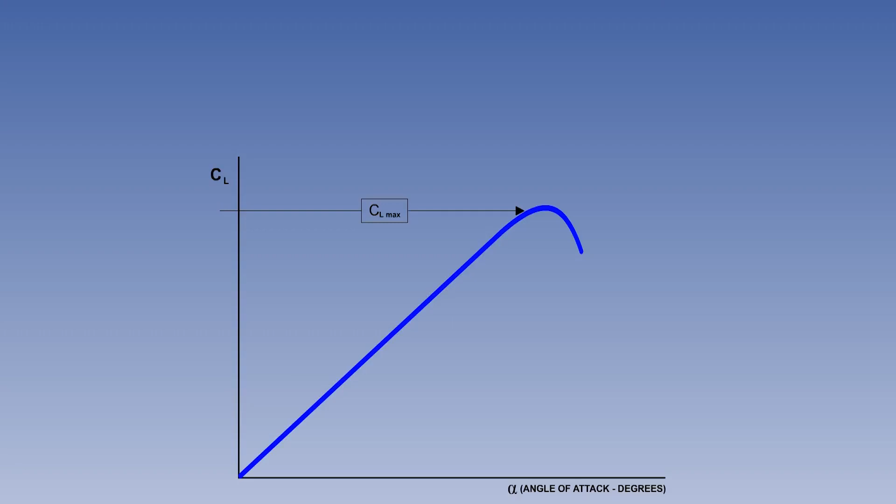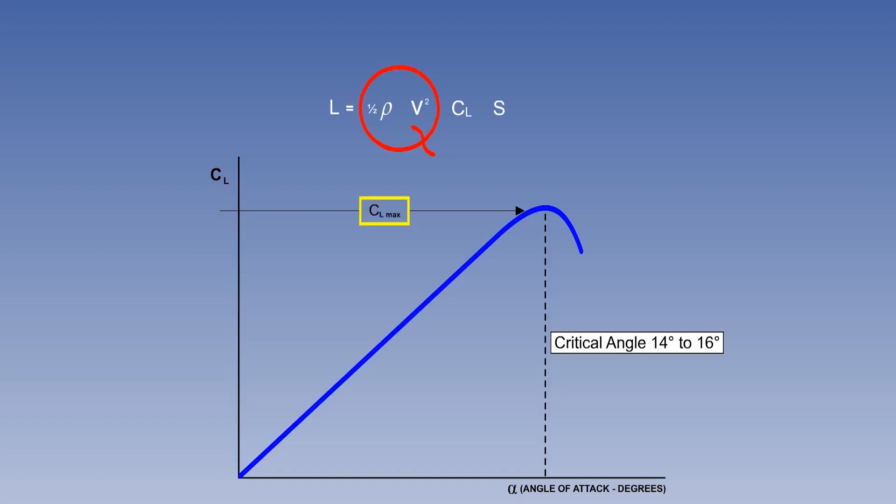There are several important facts that become evident from study of the lift curve in association with the lift equation. To maintain a constant lift force, any change in dynamic pressure must be accompanied by an adjustment in angle of attack. For a constant lift force, each dynamic pressure requires a specific angle of attack. Minimum dynamic pressure is determined by CL max, which occurs at a specific angle of attack, the critical angle, which is between 14 and 16 degrees, depending on the aerofoil. The angle of attack for CL max is a constant for a given configuration.

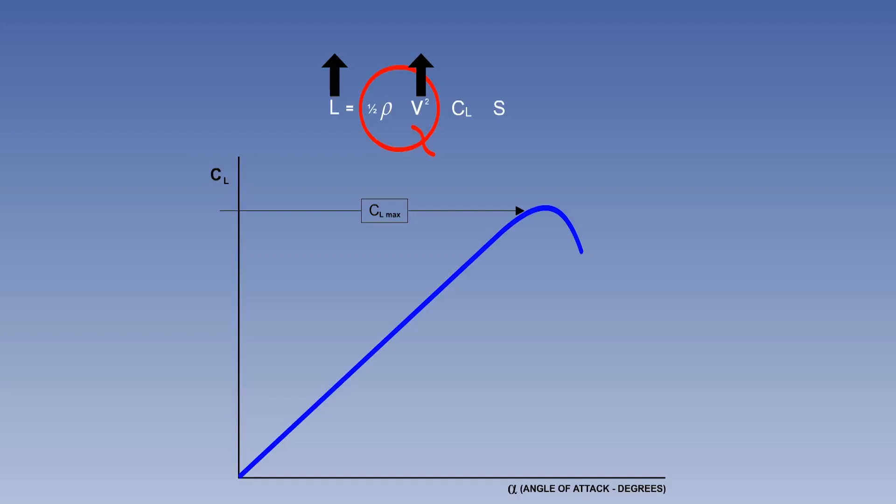If more lift is required because of greater weight, a greater dynamic pressure, that is, more speed, is required at a given angle of attack. The greater the weight, the higher is the minimum dynamic pressure or speed required for level flight.

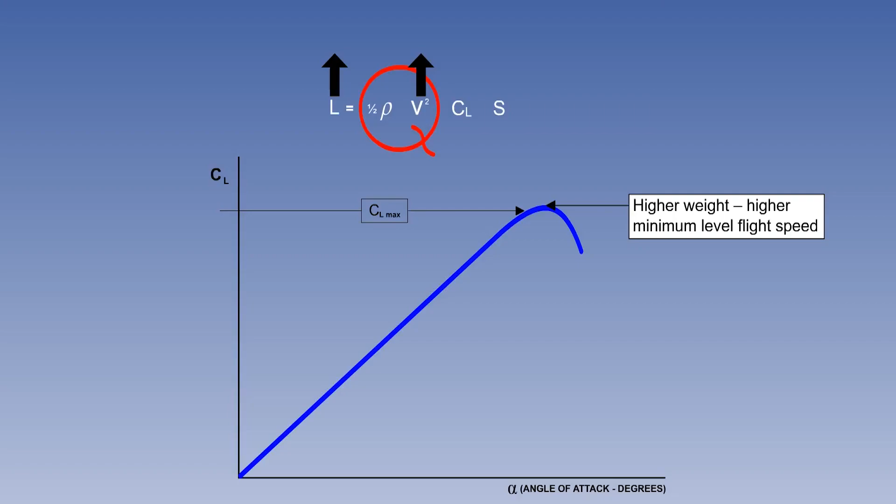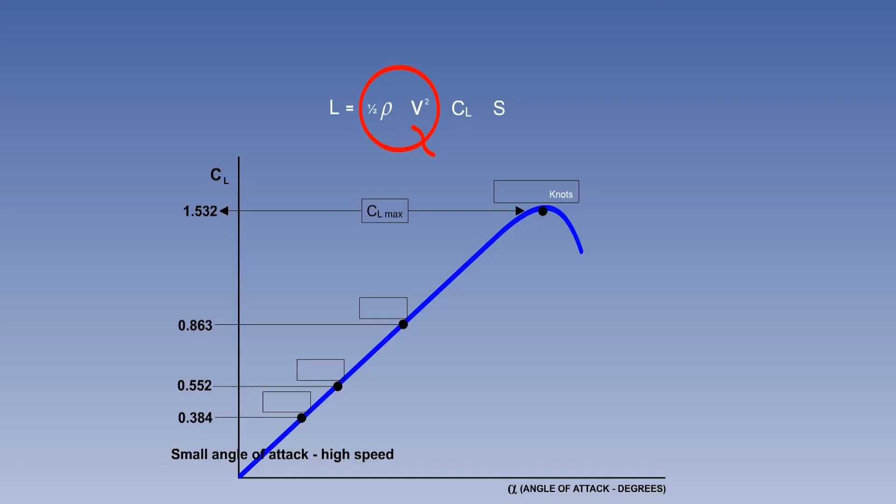The lift formula can be used to obtain data which can then be used to apply to the lift curve. But this can only properly be done if the specific values to be used are converted to SI units. To calculate speeds, we need to rearrange the lift formula to read velocity equals the square root of lift over half rho times CL times S. If the aircraft's mass is 60,000 kilograms, we need to multiply that by the force of gravity, 9.81 meters per second squared, to achieve a weight, which will be the same as the lift balancing it.

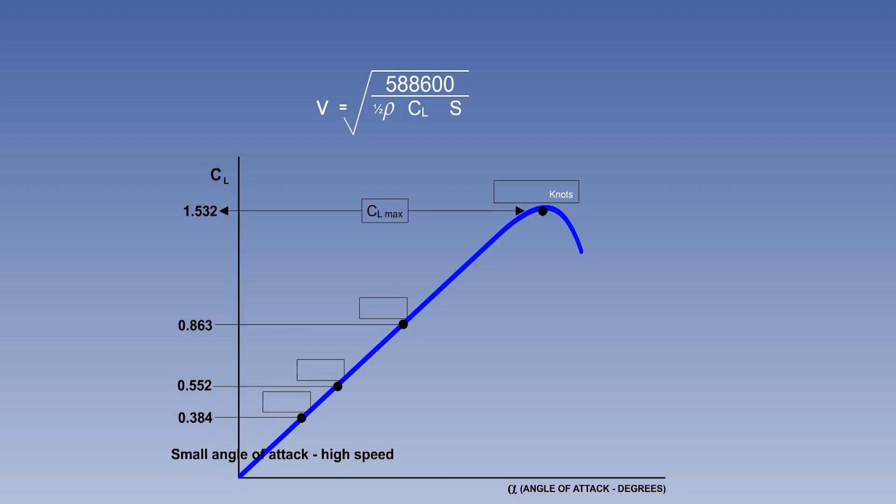The result is 588,600 newtons. If we convert the other elements, assuming ISA sea level density of 1.225 and a wing area of 105 square meters, using the CL max of 1.532, we now have the equation looking like this. When the calculation is done, the answer comes out as 77.3 meters per second. We need this speed in knots, so we multiply it by 3.28, which is feet per meter, giving

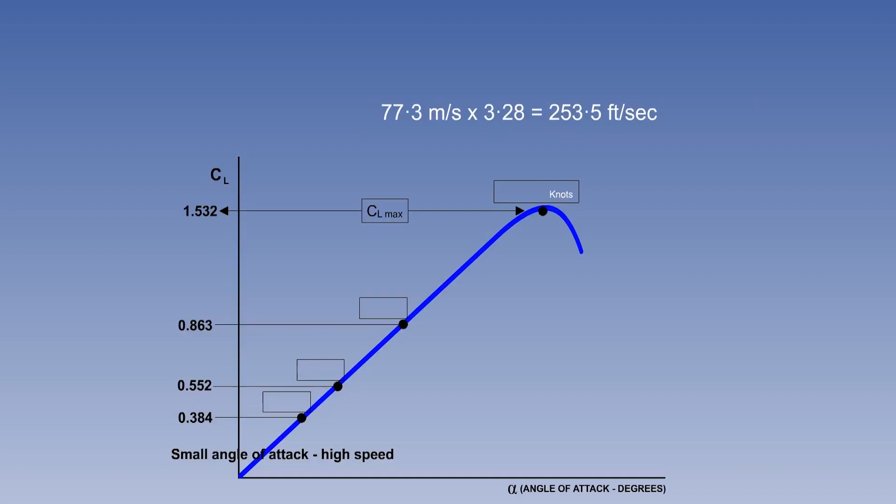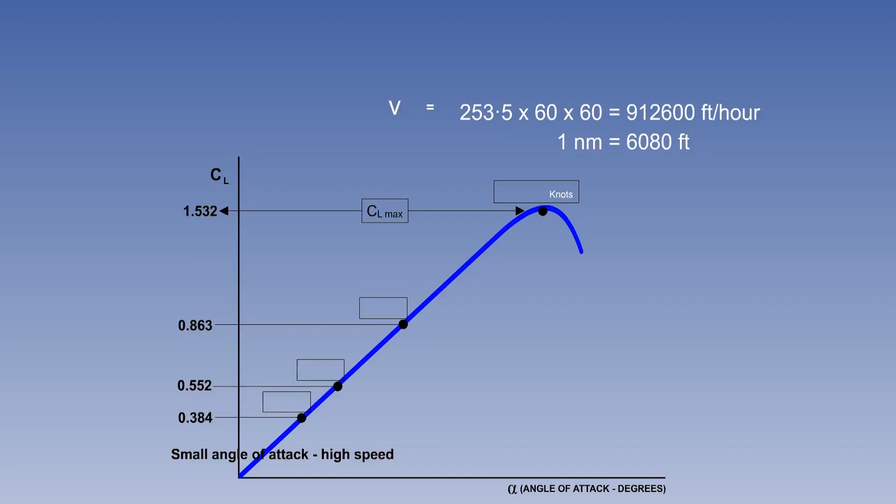253.5 feet per second. To convert this to knots, we need to make it into feet per hour, which is 912,600, and then divide by the number of feet per nautical mile, 6,080, giving the final answer 150 knots. The same result can be arrived at rather more simply by dividing meters per second by 0.514 to get knots, but we include the steps to show you the logic.

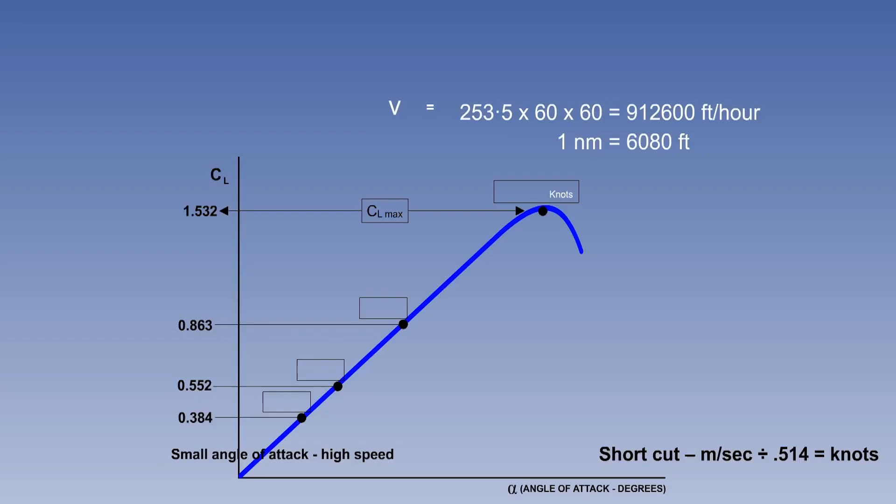Thus, it can be seen that the angle of attack at CL max corresponds to a speed of 150 knots. This method can be used to ascertain the speed that applies to any CL or angle of attack, with a reduction of CL and angle of attack giving a higher speed.

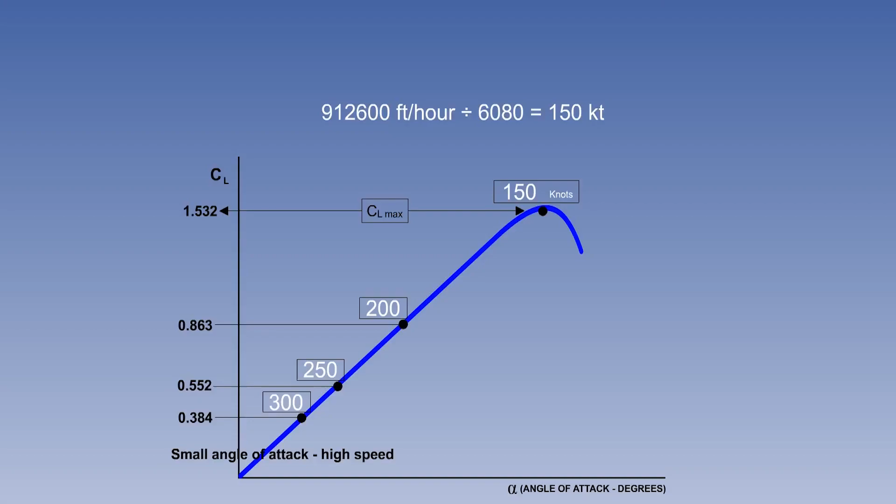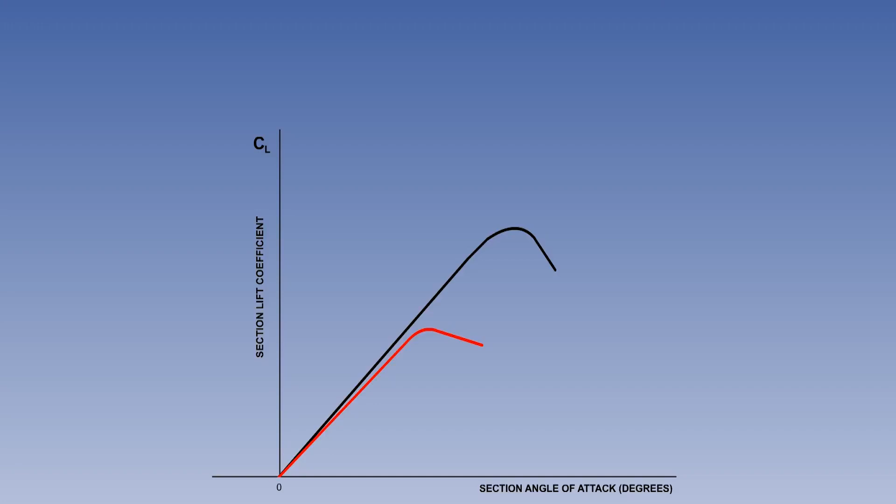Aerofoils of differing sections and thicknesses will produce different lift curves. A symmetrical section of 12% thickness will give a curve that starts from 0 on both axes. In comparison, the curve for a symmetrical aerofoil of 6% thickness shows that it will produce less lift at any given angle of attack, and reach its CL max at a lower angle of attack and at a much lower value than the 12% section, which has a CL max some 70% greater.

If the 12% section were to be cambered, its curve would move up and to the left. Up meaning that its CL max would be higher. The reason for this is that the section's stream tube has a smaller cross-section, giving greater acceleration and thus higher pressure differential. The curve's move to the left indicates that, at 0 degrees angle of attack, the aerofoil is producing lift.

Zero lift is achieved typically at around -4 degrees with the cambered aerofoil. The reason for this is that, even below 0 alpha, the camber creates a smaller stream tube cross-section than a symmetrical section, and therefore generates a small amount of lift.

The different types of aerofoil sections we have just looked at have various advantages and disadvantages. We have already seen that CL max may be increased by both camber and thickness. The importance of CL max is obvious. The greater it is, the lower is the minimum flight speed or stall speed, Vs. However, the thickness and camber required for the low Vs will also produce more form drag and larger twisting moments at high speed. A high CL max is only one of the requirements for an aerofoil section, but its main point is that it gives a low minimum flight speed.

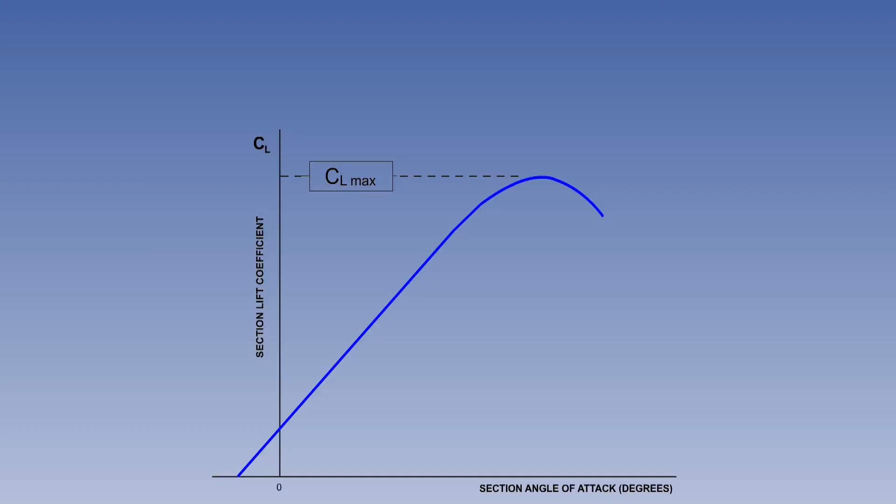With the low Vs comes the penalty of a low efficient cruise speed, because of the excessive drag generated. It is thus better to use an aerofoil that is efficient at a high cruise speed, with the ability to increase camber temporarily when it is necessary to fly slowly, such as on the approach. This can be achieved by the use of hinge sections of the wing trailing and leading edges, collectively known as flaps.

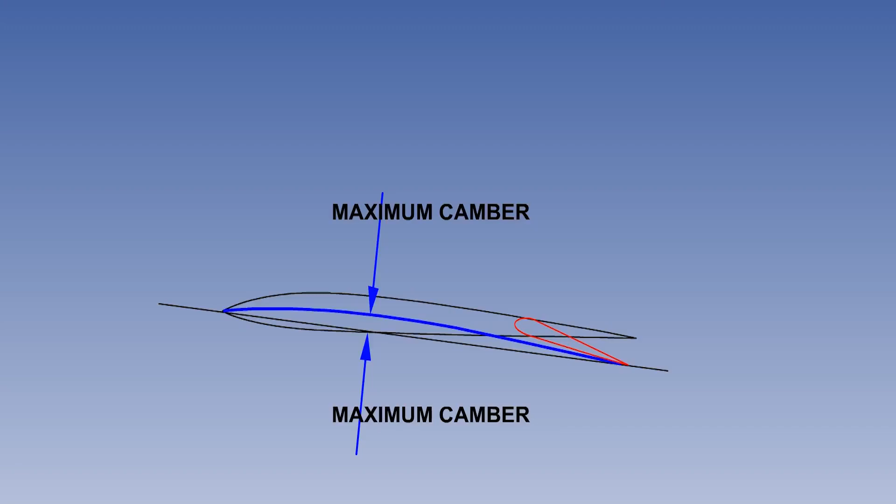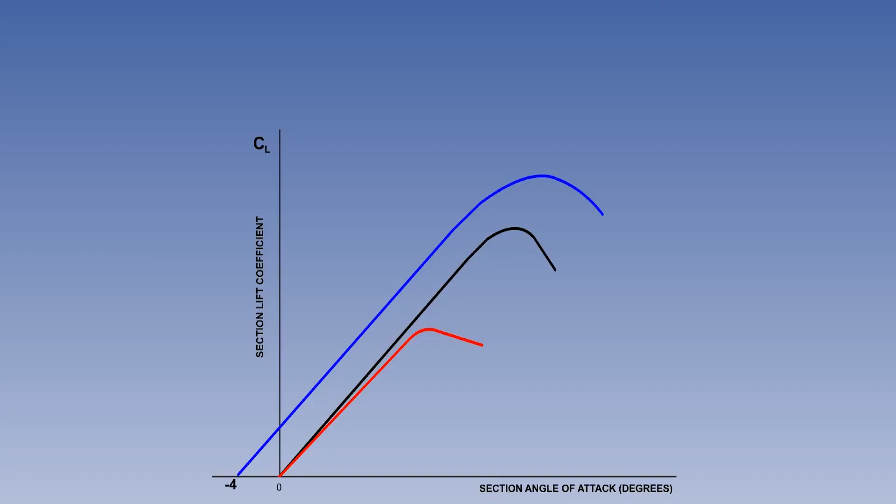The lift curve can be used to gain useful information about an aerofoil's characteristics, and, when used in conjunction with the lift formula, can give further useful data. The lift curve will be seen again soon in the lift lesson, but in combination with its counterpart, drag curve. As you will see, drag is inseparable from lift.